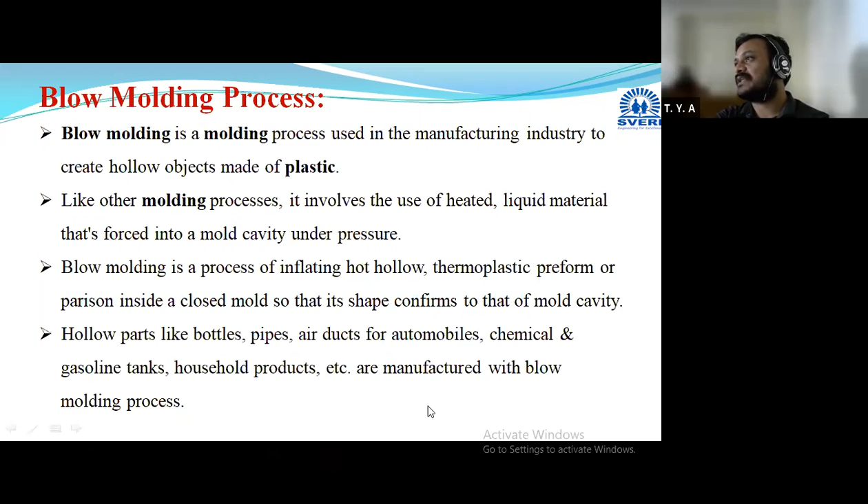In the previous session, we completed the blow molding process. Only one molding process we discussed, that is the blow molding process. Basically this process is used for manufacturing hollow components, like plastic bottles, small storage tanks, pipes, different household products, and air ducts used in automobiles. Then we discussed the basic principle, or the steps involved. It consists of the first step being preparation of the parison, also termed as the preform, then placing it between the two halves of the mold.

This is the first step. Then we close that mold in the second step, and in the third step, as that parison or preform has one opening at the top end, through that we blow it with air or compressed air. Due to this, whichever material the parison is made of gets pressed against the walls of the mold cavity, and it acquires the desired shape and size. We wait here for some time for cooling. After sufficient cooling, we remove the mold, the part is ejected from the mold cavity, and the final component is obtained.

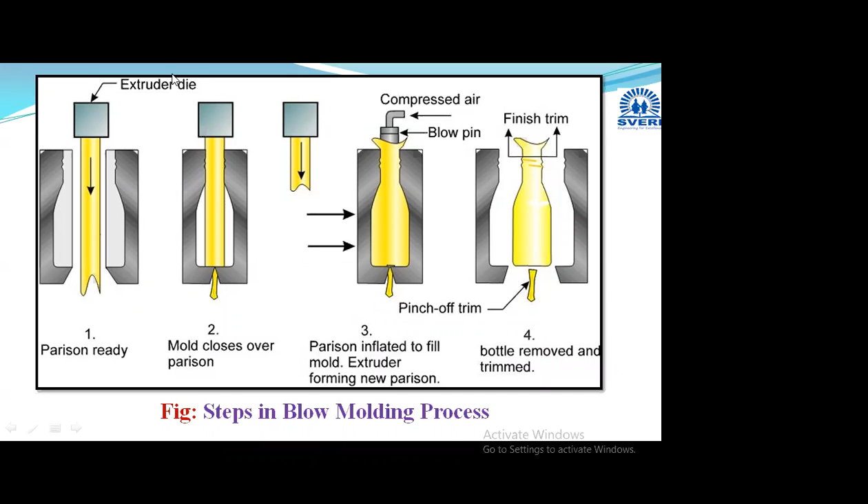Finally we get the desired product. Now in this blow molding process, some kind of flash or pinch-off may be there. Flash is nothing but some extra material that may get attached to your product. So for removing that extra material, we require some finishing operation, and finally we get the desired component.

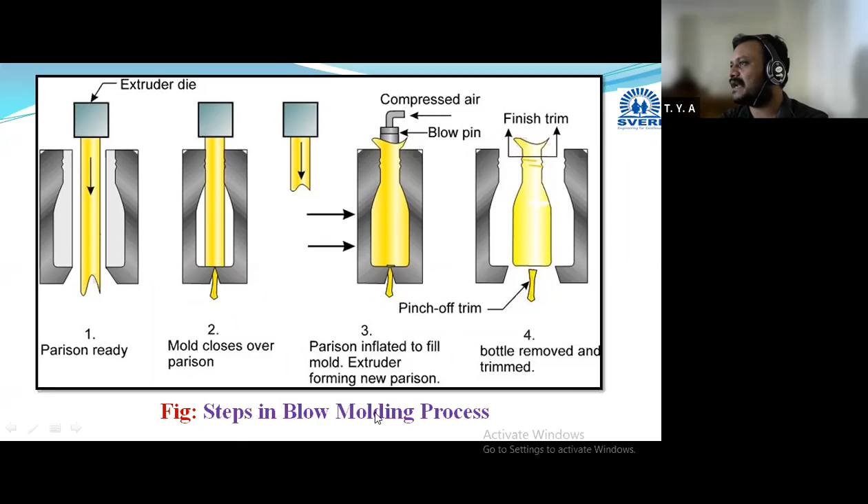Now this blow molding process is basically classified into three different types: extrusion blow molding, injection blow molding, and stretch blow molding process. These three types are further subdivided into two subtypes each, like continuous and intermittent, or single stage and two stage. The single stage blow molding process means preparation of the parison, placing it in the mold, blowing the air, and cooling all occur on a single machine. That is termed single stage, or continuous, blow molding process.

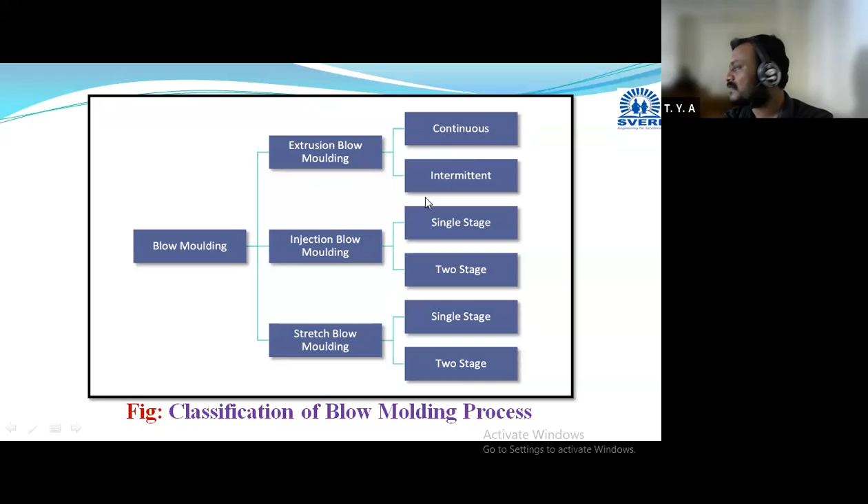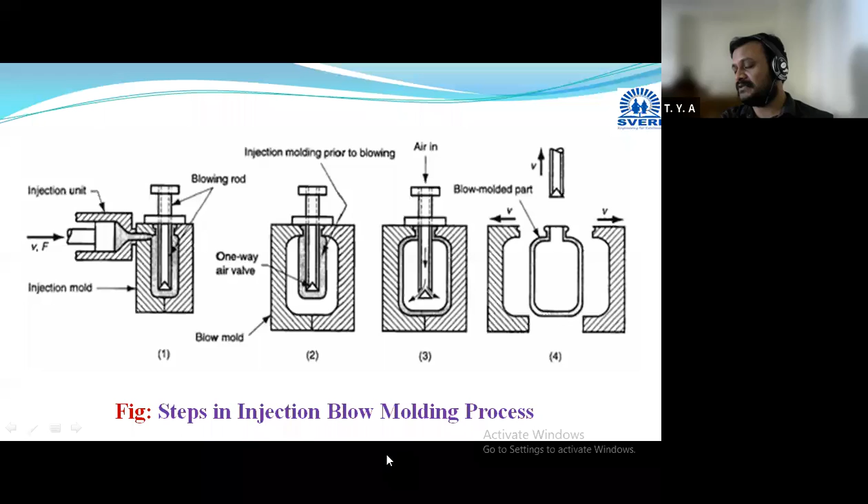Now according to the types, we have discussed their working principle. In injection blow molding process, the parison is prepared by injection molding process, and then a regular blow molding operation occurs. Then in the extrusion blow molding process, whichever parison is required is prepared by the extrusion process, and the remaining steps are the same as in the simple blow molding process.

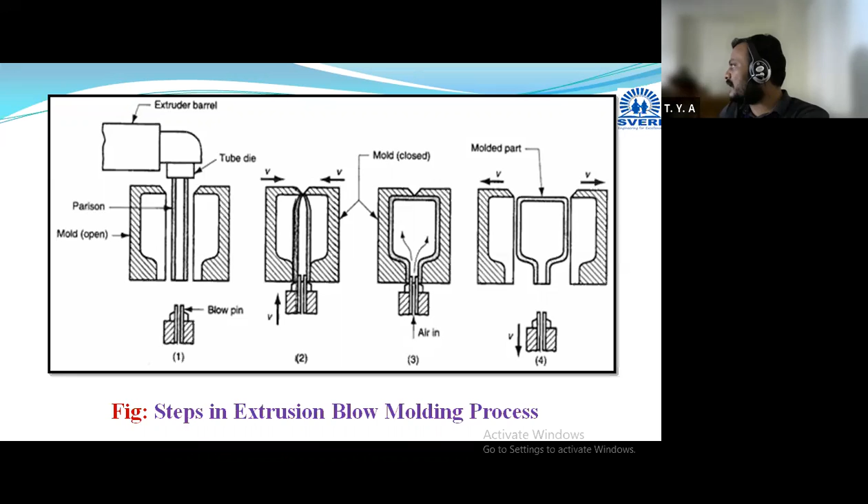Then in the stretch blow molding process, some stages are different. The parison is prepared, then the parison or preform is preheated, and after that it is stretched by a controlled amount of air, and then the full air is blown. This is the full blowing, and this is the stretching or pre-blowing. The remaining steps are the same.

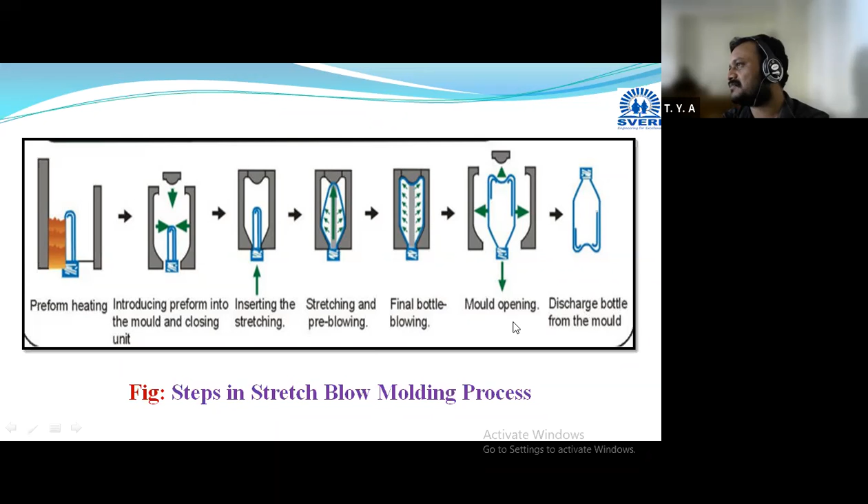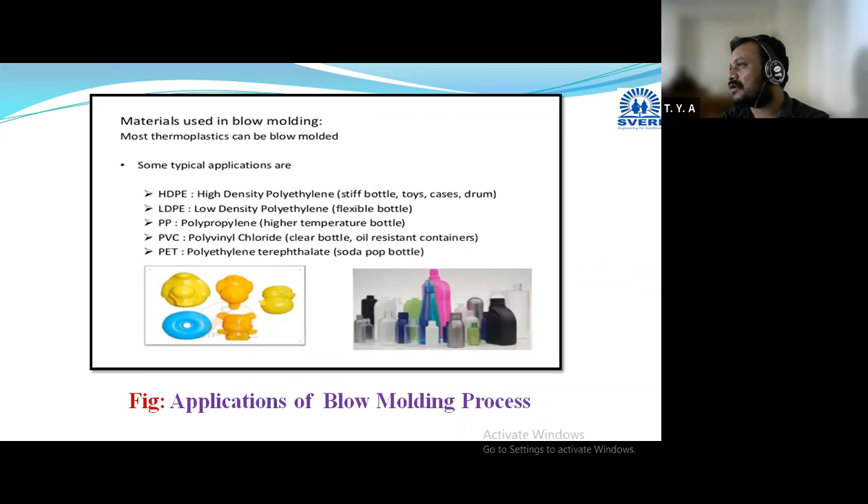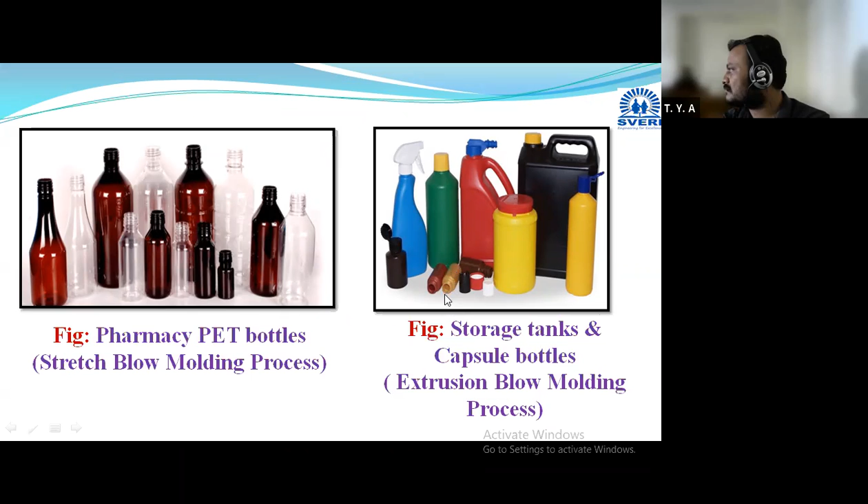These are some applications of the blow molding process: different hollow toys, cold drink bottles or water bottles, different storage tanks or water storage jars, cosmetic bottles or tubes, pharmacy bottles where we store medicines or syrup, storage tanks, small capsule bottles, and different cosmetic packagings.

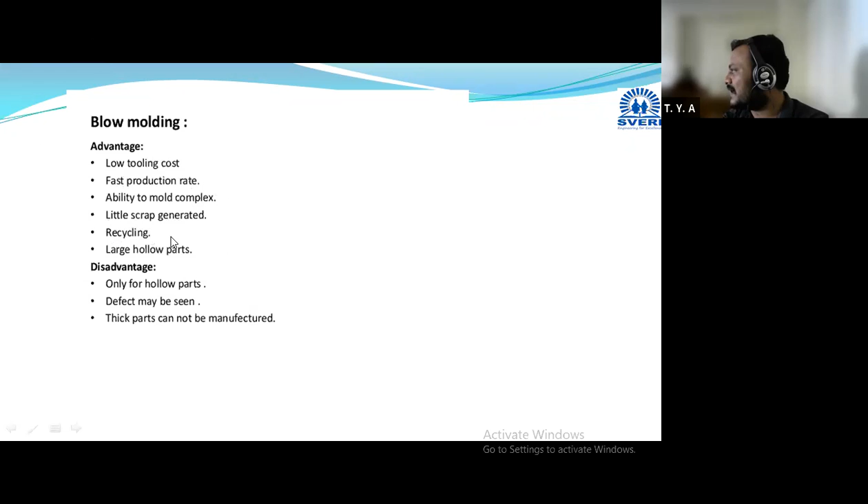So these are some advantages and disadvantages. As a disadvantage, we can only manufacture hollow components here, and some kind of defects like flash may be there. As advantages, the cost of tooling is less and there is a fast production rate. You can also recycle the material. Whichever processing methods we use for thermoplastic materials, like injection molding and extrusion molding, we can recycle that material. But in case of thermosetting plastic materials, we cannot do the recycling.

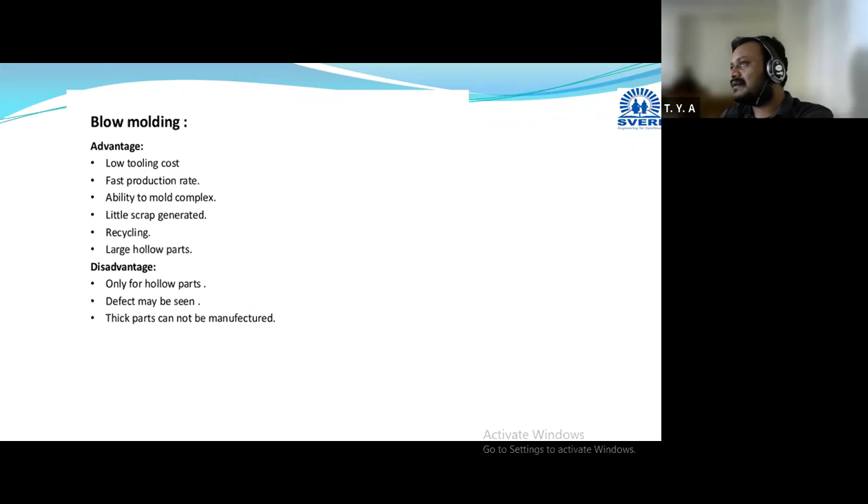Is it clear? Then after this, we will move towards today's session, where we are going to discuss the processing of thermosetting plastic materials. Now, we have already discussed the difference between thermoplastic material and thermosetting plastic material.

In case of thermoplastic material, we have seen that whenever we provide heat to it, it starts melting and we can give it the desired shape, and after cooling it becomes hard. We can repeat this process again and again, meaning whichever process we conduct on thermoplastic material is reversible; we can do it again and again. But in case of thermosetting plastic materials, how are we going to give shape to them?

Whenever we provide heat and pressure, it will get cured. Cured means it will acquire whichever shape you want to give, or whichever mold cavity you provide, according to that it will acquire the shape.

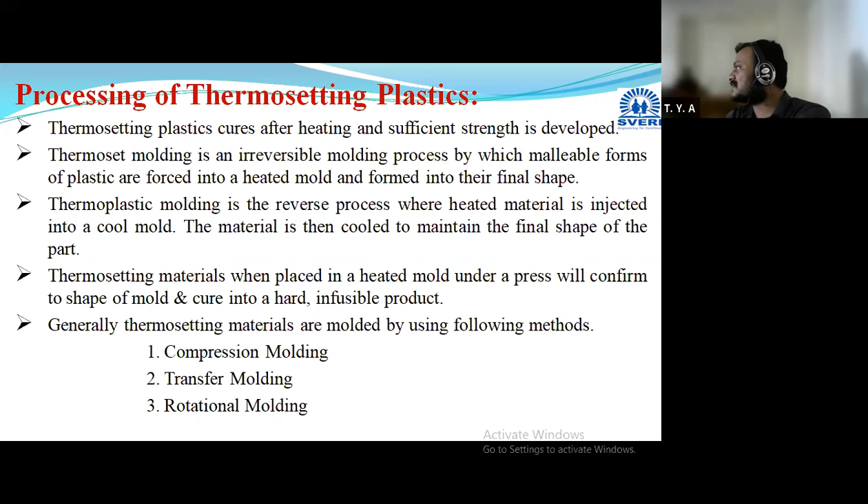Now, compression molding is one of the forming processes, meaning whichever raw material is available, we are converting it into the desired shape and size in usable form. This process basically consists of only two steps, but for easy understanding, I have divided it into 4 parts. The first step is preheating of the charge or raw material, and the second step is pressing or pressurizing.

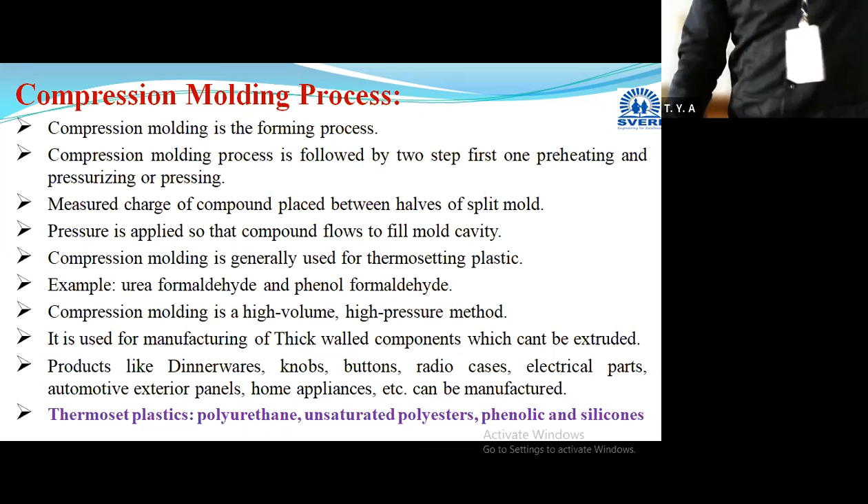Then radio cases, and different electrical parts like switchboards, which I have already shown you - the switches and the plug socket where we put the plug. Also automotive exterior panels, like the outside body parts such as bumpers, are manufactured with the help of the compression molding process.

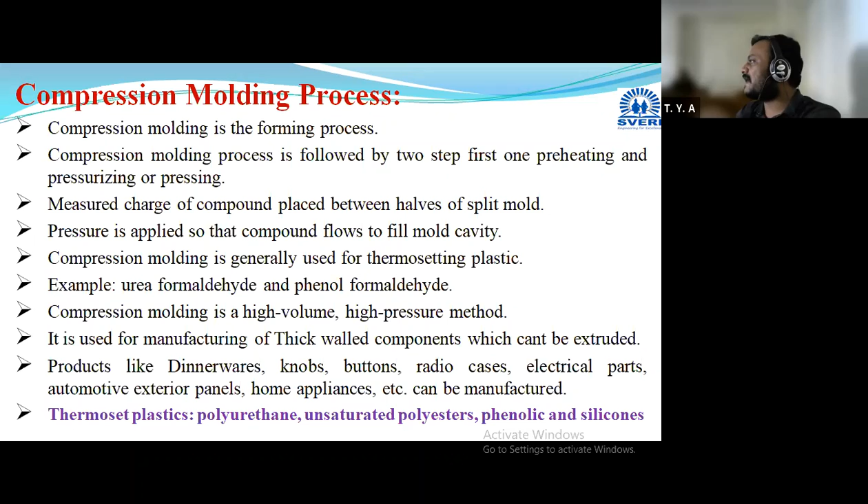These are commonly used materials: urea formaldehyde, phenol formaldehyde, polyurethane, unsaturated polyesters, phenolics or silicones. Now, these are some basic parameters that affect the compression molding process: quantity of your charge, meaning quantity of raw material, then amount of pressure, temperature, and cure time.

What is the meaning of cure time or curing time? When initially we are preheating the charge, and after application of pressure, the mold cavity is heated. Why do we heat it? In thermoplastic materials, what we have seen is that they are basically formed by addition polymerization, as we have discussed in the polymerization process.

This means no byproduct is formed in thermoplastics, but in thermosetting plastic materials, polymerization occurs with the formation of some byproducts. When we are pressing it, some byproducts get released, and that's why the mold is heated - to eliminate those byproducts. Suppose some acid or water is formed, it will get eliminated and the polymerization process gets completed. In simple words, the time required to complete the polymerization process with application of force is termed the cure time or curing time.

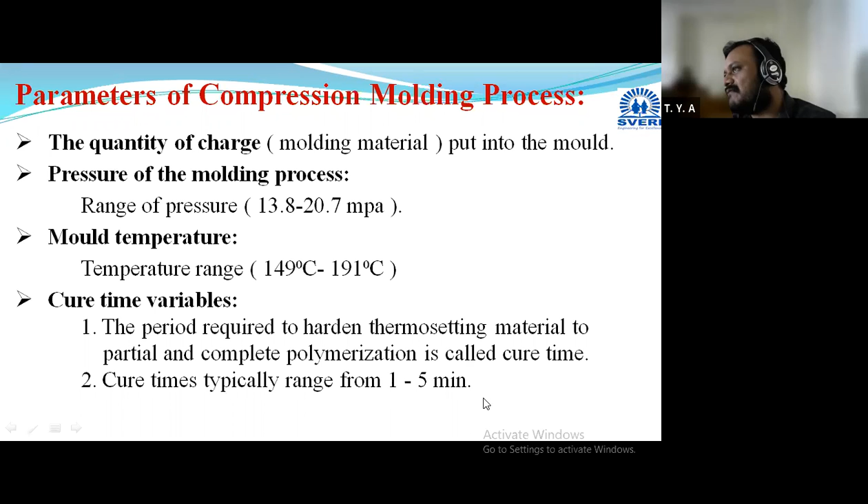Why do we provide a heated mold cavity in thermosetting processing methods? Because in that polymerization process, some byproducts get released, and to eliminate them we have to provide heat. When they get eliminated, the polymerization process is completed and the material becomes hard. The time period required to harden the thermosetting material, to partially or completely finish the polymerization process, is termed the cure time. This cure time varies in the range of 1 to 5 minutes depending on the different materials.

Now, these are some important points that you have to consider or keep in mind while performing or before starting the compression molding process. Automatically, you will be able to write these points when you understand the basic principle. Just means how to select the proper amount of the material, then amount of energy or heat required, then time required,

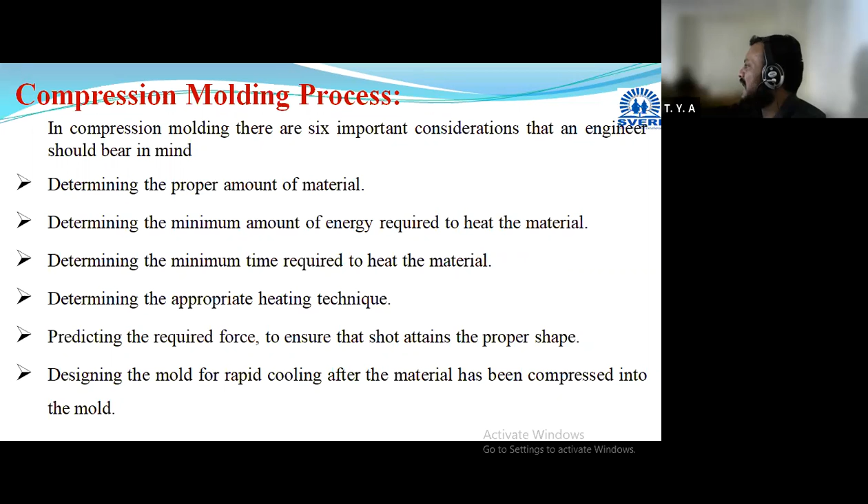then which technique you are going to use to provide the heat, then amount of pressure or force required, and how we are going to do the designing of the mold. All these parameters you have to decide before starting the process. This is not part of your syllabus, just I have added it for your information. Now we will move towards the main part.

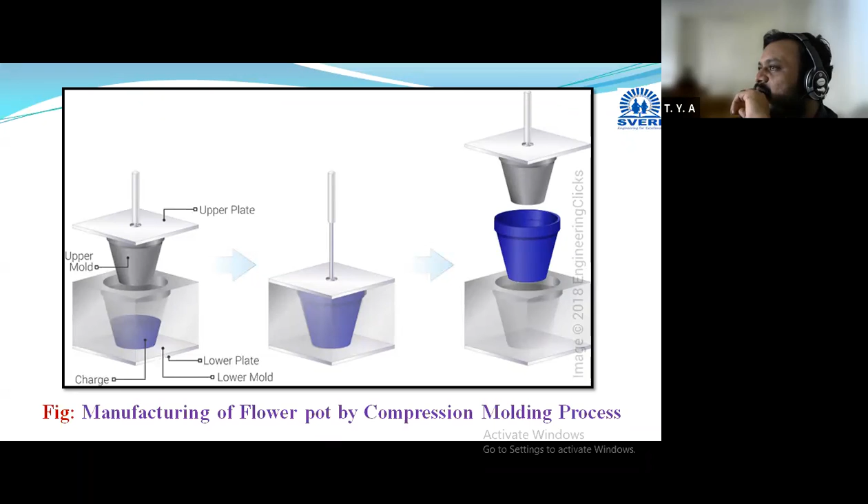If you are having any doubts, please ask me. Generally we are using a steel mold; the mold will be made of metal. No, as it is thermosetting material, it will get removed. It is thermosetting material. Or sometimes you can apply some lubricants to that surface. Any other question? Okay.

You can draw this diagram, any one diagram for your understanding. This one or this one. Please draw any one diagram. Which one is better? This one or the previous one? Previous one. Please draw this diagram. I will wait for 1 minute here.

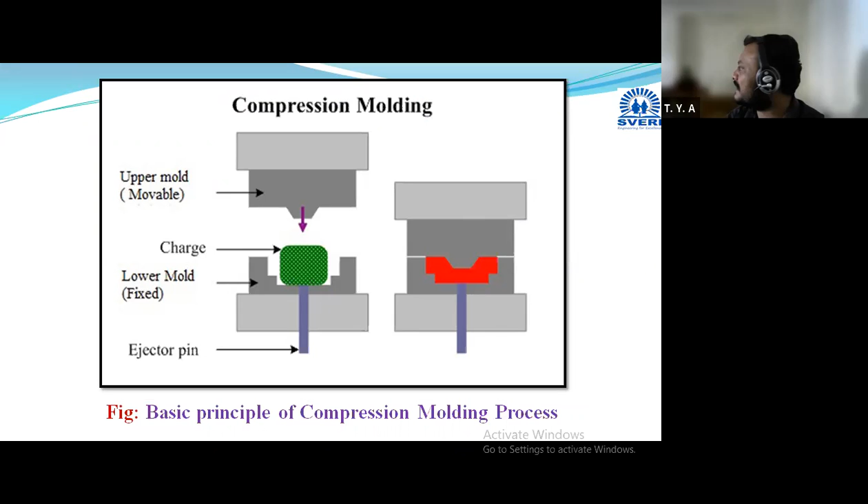Why are internal stresses minimum? Because here in the mold we are providing heating along with pressure. Simultaneously heating is there and pressing is done. Hence, whichever stresses are there will get released. Internal stresses are released continuously. Hence, you can say that internal stresses are minimum.

Then warping is very minimum. Warping means sometimes your component will get bent. Okay, it will get bent, or other than the shape of the mold cavity, some extensions may be there. That is termed as warping, and it is very less in this case. Okay,

then in this arrangement, unlike a number of processing methods where runners, sprues, or gates are required, no such arrangement is required. Directly in the mold cavity we are taking the charge and applying the pressure. For transferring the raw material, no medium or tool is used. That's why you can say there are no gates, sprues, or runners.

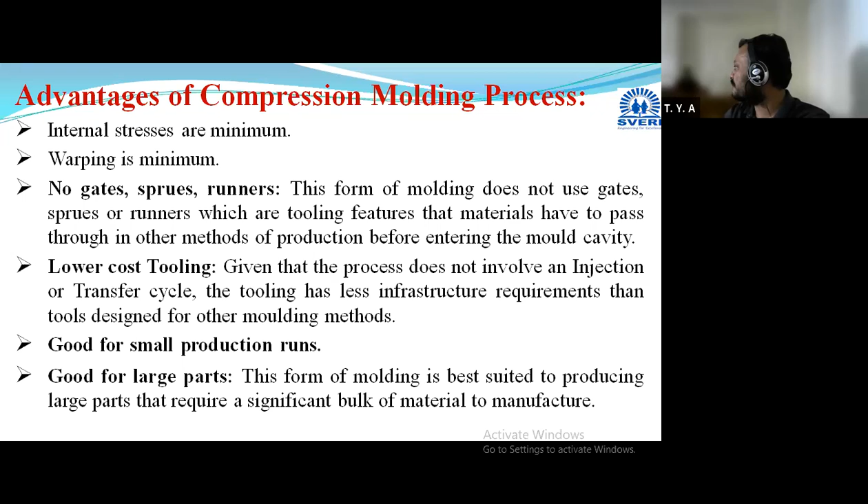It will decrease the cost. Your tooling cost or material cost will be reduced. That is mentioned here: lower cost of tooling. Then it is very good for small production runs. And large sized components can be easily manufactured. Outer body parts of your vehicles are large in size, and all these parts are manufactured by the compression molding process.

Then what are the disadvantages? Wastage of material will occur. As we are pressing it, some material may get removed or wasted from the die cavity due to the sudden application of pressure. So wastage of material is very high. And labor cost is also high, because skilled workers are required. This is a very risky operation, that's why skilled workers are required.

Then the processing time is very high, because curing of the plastic raw material will take some time. As curing time is high, automatically the processing time will be increased. Hence, you can say that compression molding is a time-consuming process.

Then complex shaped components cannot be manufactured. If intricate or complicated shapes are there, we cannot manufacture them. The outer body parts of your vehicles are simple in design or shape; that's why we can use the compression molding process. Otherwise, if complex shapes are there, we have to go for another process, and that method is the transfer molding process.

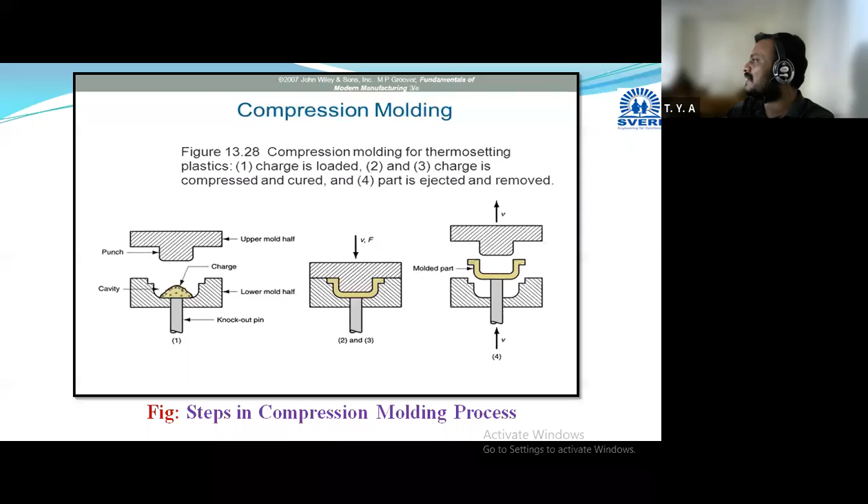Then the molds we are using: this is your mold, and continuously we are applying pressure, so between these two parts of the mold there will be wear and tear. We are applying force, friction will occur between the two parts, and some material loss or damage may occur. So these molds can be subjected to wear and tear due to the repetitive pressing operation.

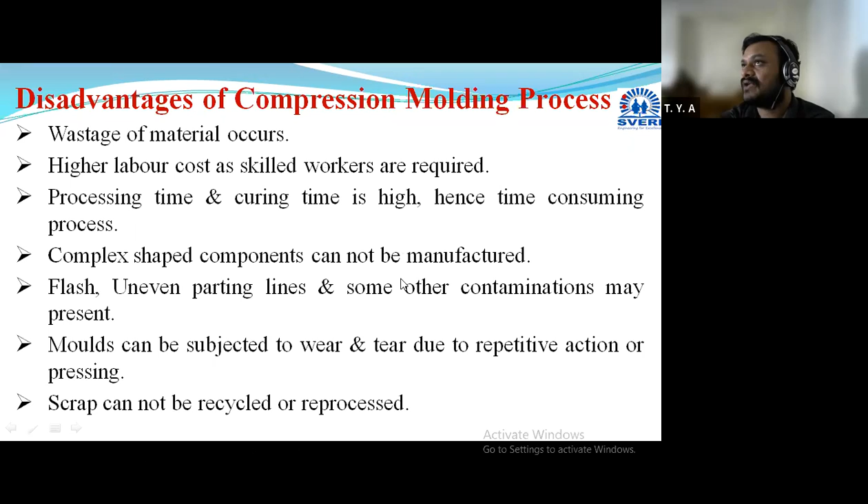Then whichever scrap is produced cannot be recycled or reprocessed, as it is a thermosetting material. This is the flashing, already explained. Upon removal, it's quite common for the molded product to contain some excess material; it is termed flashing. It is removed by an experienced cleaning team by performing finishing operations.

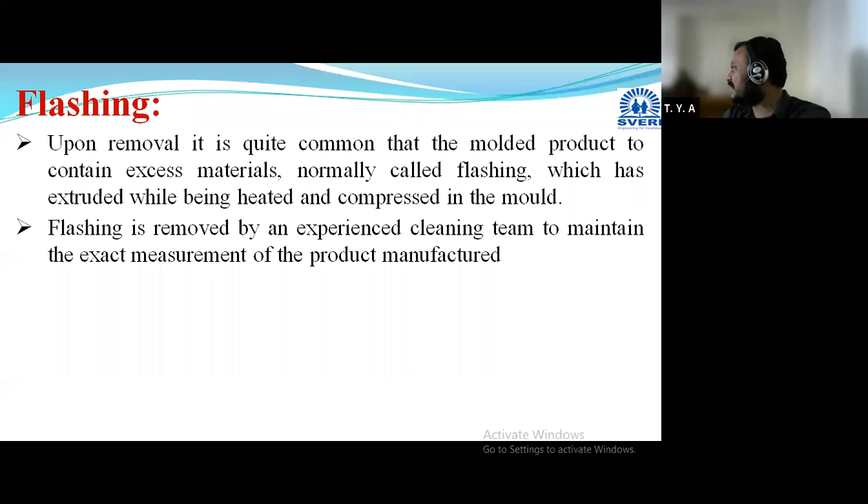So these are some applications of the compression molding process, different plastic components manufactured. This is the energy meter casing. Then mirror body. These are electrical receptacles, where we fix our chargers or accessories. Then these are plates made of plastic, and these are buttons. Then your hairbrush handle. All these are manufactured with compression molding.

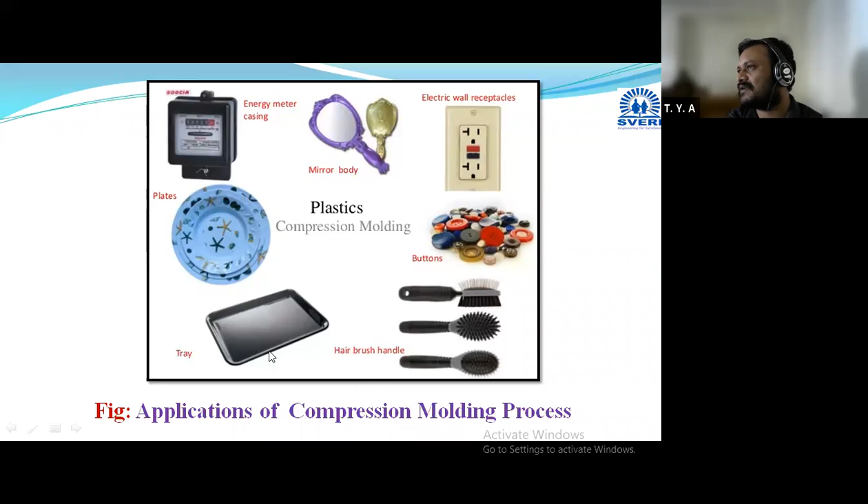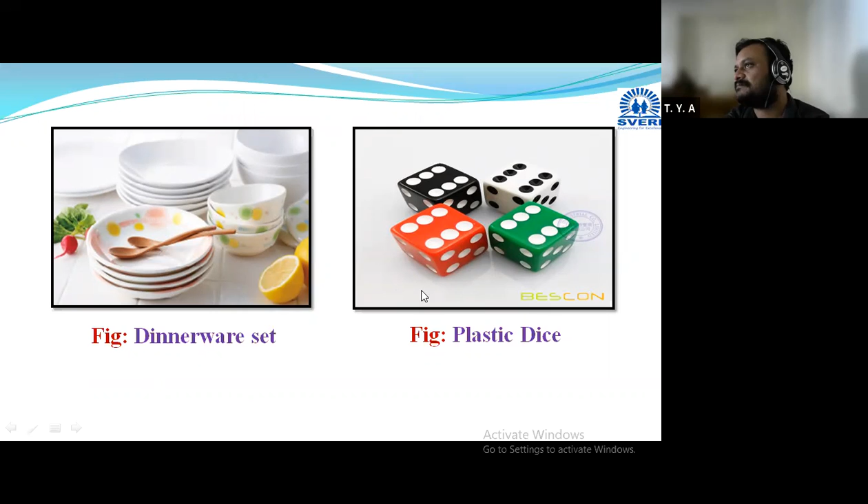Then these are different plastic trays. This is a dinnerware set: this plate, this bowl or dish. Then different kinds of spoons. Then plastic dice are also manufactured. Some parts may be repeated: dinnerware, buttons, knobs, home appliances, outer body parts of vehicles. This outer body part is manufactured with compression molding.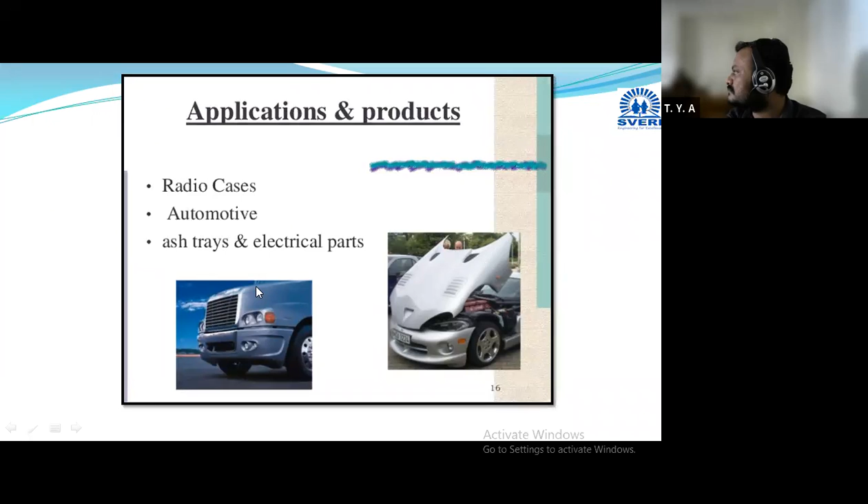Now the next type is the transfer molding process.

Okay, I will try to complete it within 10-15 minutes. I will repeat this again in the next session also. I will just take the basic concept. Okay.

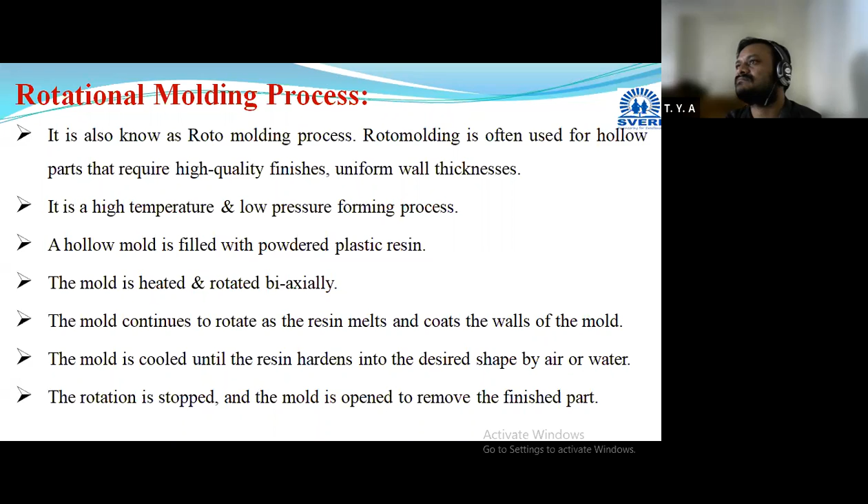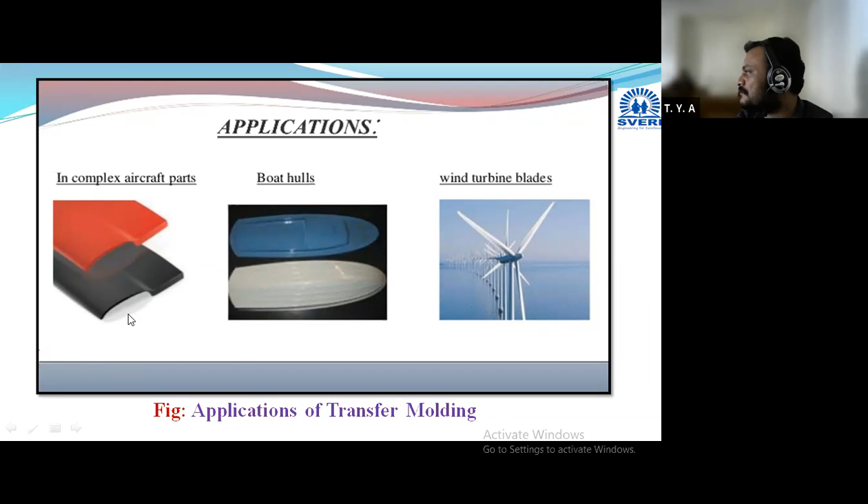Now, where is this transfer molding process used? In compression molding, as we discussed in the disadvantages, we cannot manufacture complex or intricate shaped parts, meaning we cannot give thermosetting material an intricate shape. Here, intricate shapes means bathroom fixtures, which can be manufactured with transfer molding, or turbine blades, boat hulls, or different parts in aircraft. All these can be manufactured with the help of the transfer molding process.

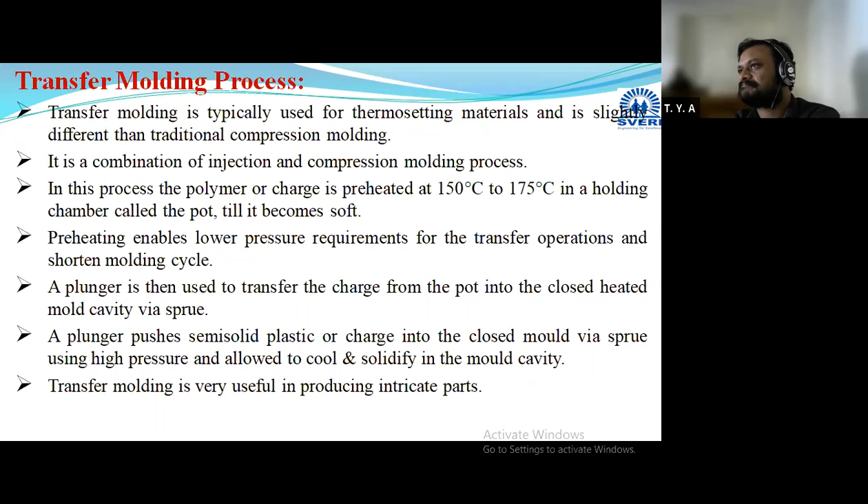Now, in this transfer molding process, this is the description. You can go through it. I will explain with the help of the diagram. All the points and steps will be here. Now, this is the working principle diagram.

Initially, the upper part will act as a plunger, and here a cylinder or pot is given. In this cylinder or transfer pot, the charge, or preheated raw material, is placed. The preheating is done in the temperature range of 150 to 175 degrees Celsius, then it is placed in this transfer pot, or cylinder.

In the second stage, with the help of this plunger, we apply pressure on this charge. As some preheating is done, the material is a little plasticized, so it will move through this sprue and enter the mold cavity. Whatever heating is required is done with the help of these heaters.

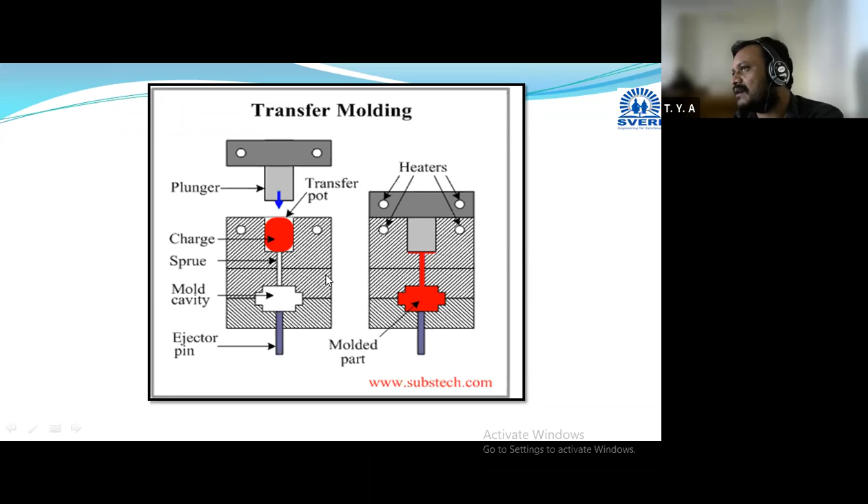Then this plunger is removed, the mold is opened, and the final part is taken out with the help of these ejector pins.

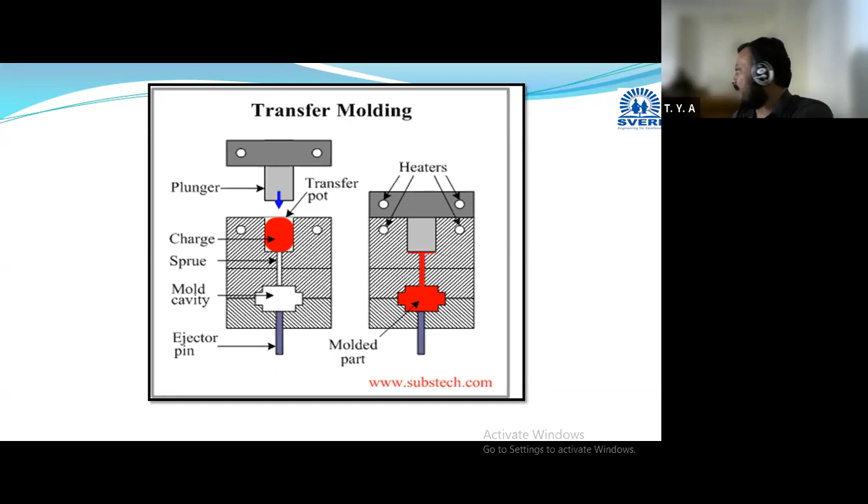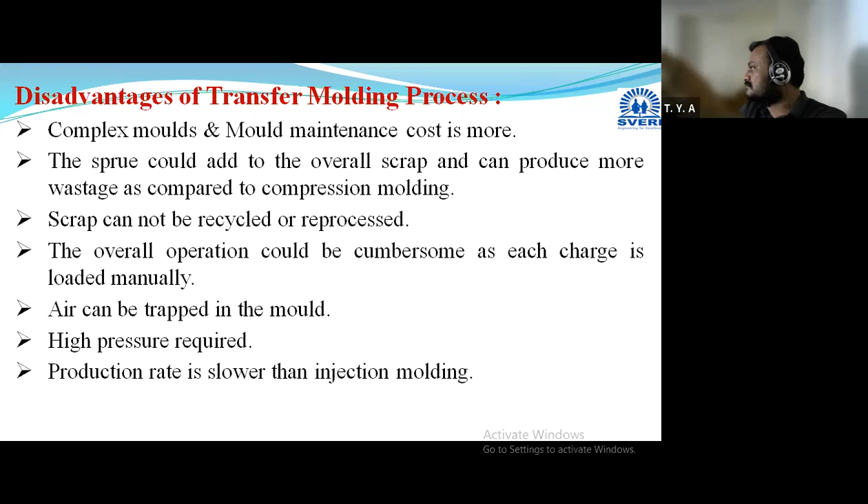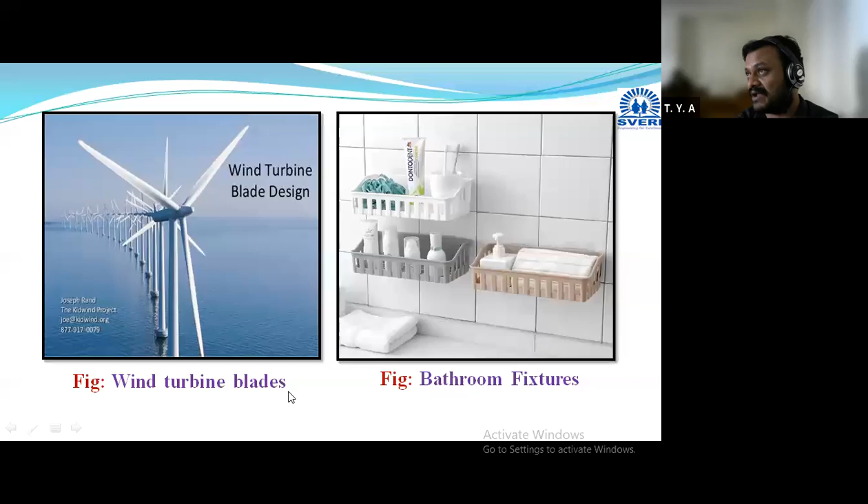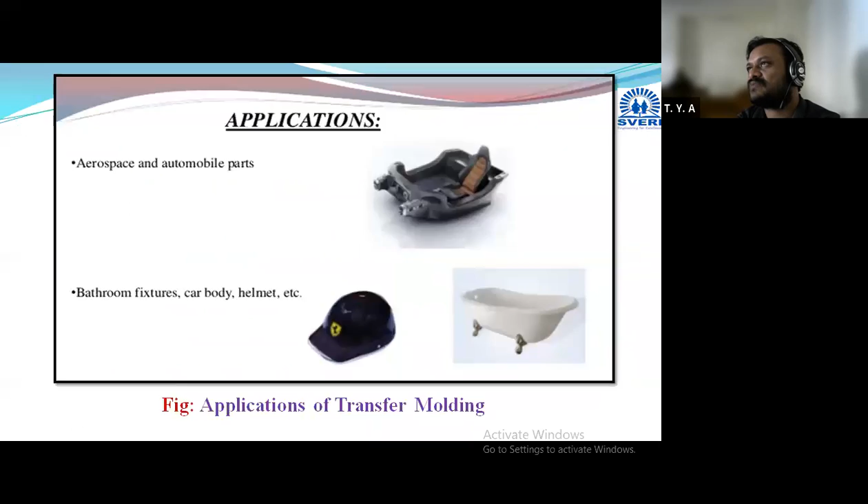This transfer molding process can be used in different industries. I have highlighted some components: bathroom fixtures, wind turbine blades, boat hulls, different aircraft parts, helmets, some automobile parts, and more bathroom fixtures.

In today's session, we have completed the compression molding process and transfer molding process with their working principle, advantages, disadvantages, and applications. In the next lecture, we will discuss the rotational molding process and repeat some part of this transfer molding process.